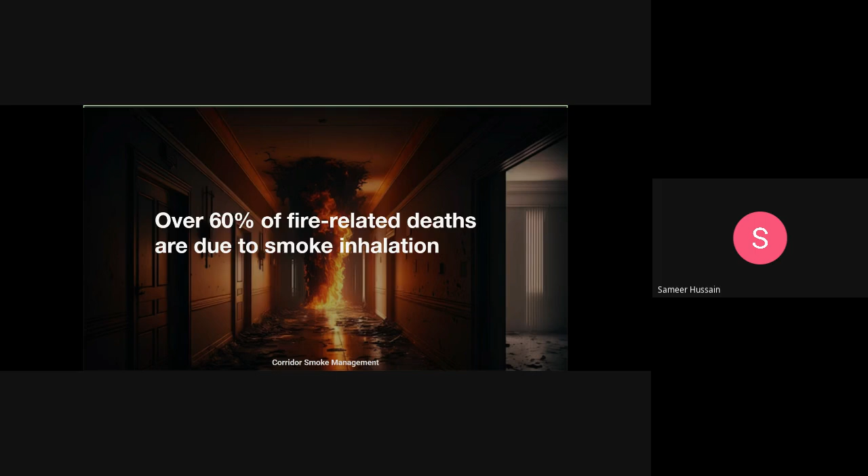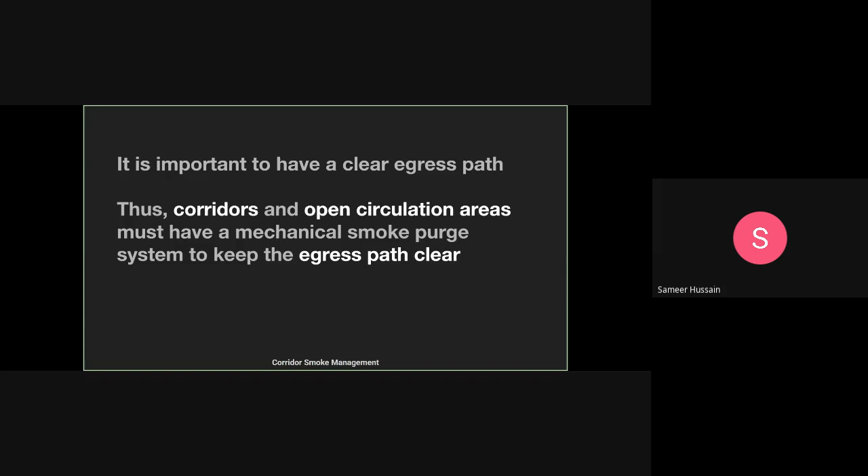So coming back to the intent, as a design intent, our job is to remove the smoke from the corridor and keep it free for people to evacuate. That's a strategy. Why do we do this? Because we need to keep the corridors and the egress path clear of smoke so that people can easily evacuate.

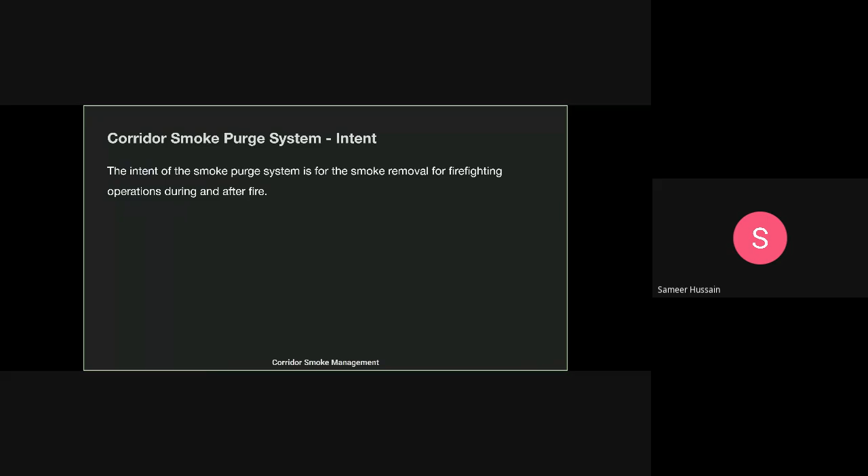Apart from people evacuating, we also need to take care of firefighting operations. The firemen, as they come to fight the fire, they also need the corridor free of smoke. So this is how we are designing the smoke management, particularly for a corridor.

So next question: how do we decide it? How do we decide how much airflow is required? Whether it is 200 liter per second, 300 liter per second, how do we decide that? So it's a very simple strategy to find out the flow rate that has to be taken out from the corridor, which is 6 ACH.

So what is ACH? ACH is the amount of air. Let's say you have a balloon - if you take out the entire air from the balloon one time in 1 hour, that is 1 ACH. So 6 ACH means you are removing the air completely 6 times in 1 hour. So the corridor smoke management flow rate required should be a minimum of 6 ACH. This is for extract.

So in corridor smoke management, what do we provide? We provide extract air and also makeup air. On extract, again, I have a question - I believe most of you are mechanical engineers. In case of fire, you have a corridor and you have a staircase. How do people evacuate?

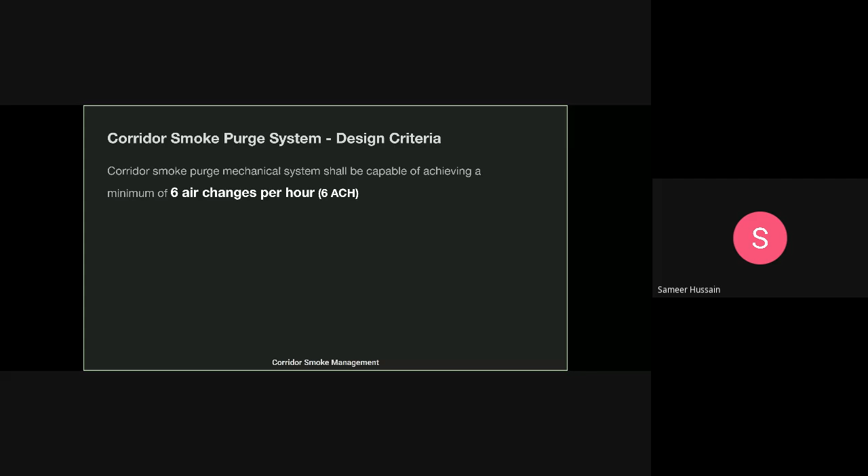As we're extracting 6 ACH, the makeup should be less than the extract. The code says consider 6 ACH for the extract, and 85% of that 6 ACH should be makeup. I'll give you the numbers one more time: 6 ACH for the extract flow rate, and 85% of that 6 ACH should be your makeup flow rate. Okay, let's move on, we'll do that in the coming slides.

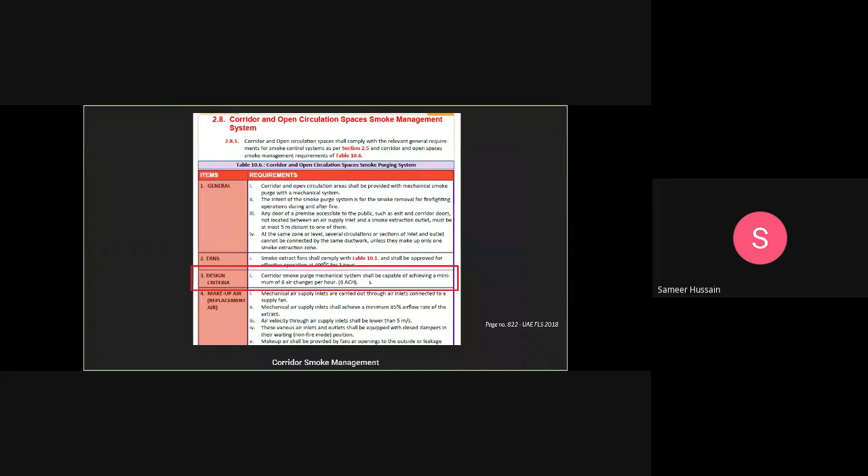So this is what the extract of the code is. This is taken from the UAE FLS code 2018 version, page number 822. If you go to this page, you'll find this particular clause or guideline. Clear? We'll move forward.

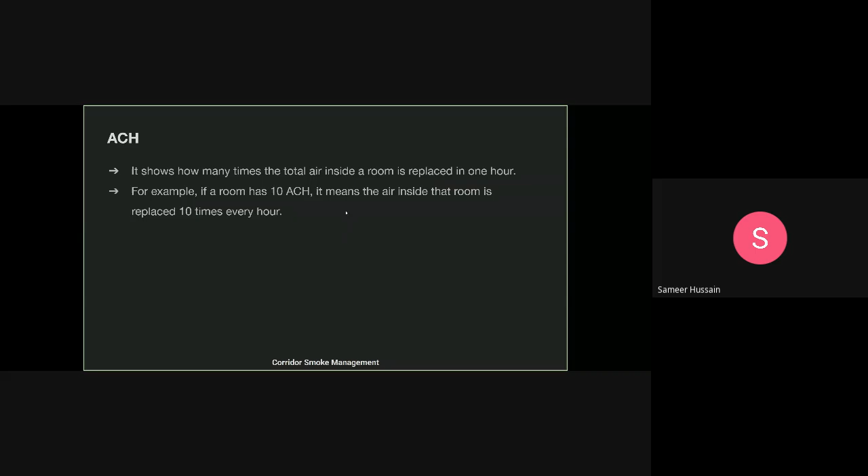So as I said, what is ACH? It's how many times the total air inside a room is replaced in 1 hour. If it is 10 ACH, you need to do that 10 times in 1 hour. Clear?

Okay, we discussed this - 6 ACH you need to do for the extract. For the makeup, you need to do 85% of that.

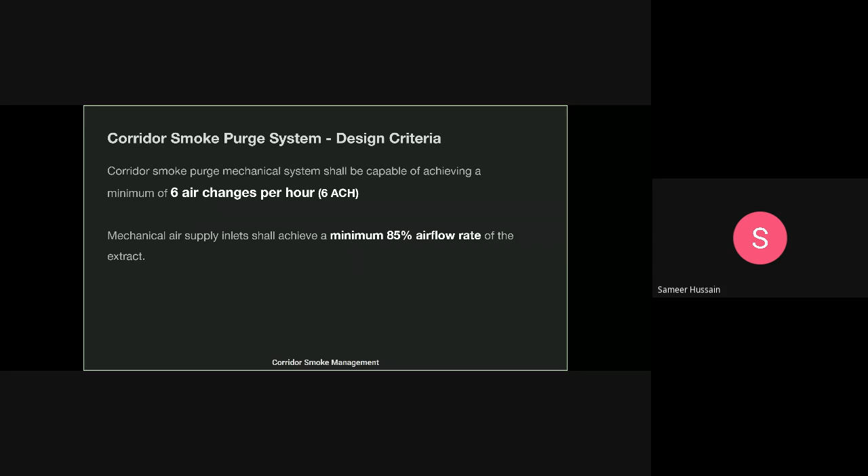Now, the question - usually designers get confused here. When you're doing extract calculations, let's say in a corridor, you will have a false ceiling, let's say of 700 mm void. So when you're calculating the flow rate, how do you do it? We have 6 ACH, and for that you take the area of the corridor into the height of the corridor, giving you the volume, into 6 ACH - that's your flow rate.

So for the height of the corridor, what height should you take? You should take it to the false ceiling level, or until soffit level. So to answer the question, you should consider the entire volume, which is until the soffit of the slab. Now, what is soffit of the slab?

Anybody has an idea what is soffit of the slab? No idea? So, till ceiling - basically soffit of the slab is, let's say you're standing on a floor, and if you look up, you'll find the slab there. So that bottom of the slab, once you look up, is the soffit of the slab. Perfect.

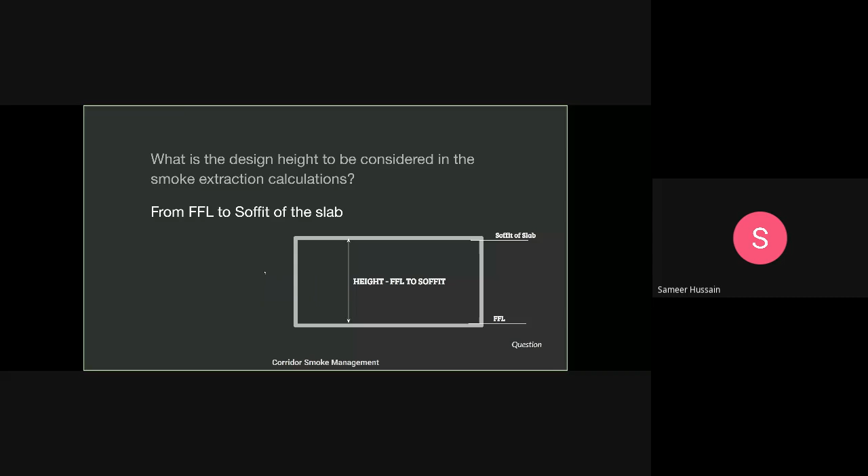Okay, next is corridor smoke purge system. Smoke extract fans, obviously, are dealing with smoke, so for sure the smoke temperature will be very high. That's a different subject, but the extract fan specifications or rating should be such that, as per code, it should withstand 400 degrees for 2 hours.

Next, the backup should not be provided - the standby is not required for the smoke fans. Whether it is corridor fans or basement fans, whatever fans they are, the code clearly says standby is not required.

Perfect. Next, the makeup fans. Again, as we are extracting the smoke from the extract fan, it should be fire rated. How much should it be? It should be 400 degrees for 2 hours, it should sustain that. Whereas the makeup fan can be fire rated or it cannot be fire rated.

Because the makeup fan pushes air from outside to inside, if the fan location is at roof level, which is open to sky, then we don't need to provide fire rating for this fan. Or if the fan is in the fire zone itself, let's say in the basement level - basement is a different subject, but just to get an idea - if the fan is in the fire zone, in many cases in basement, that fan should also be fire rated, the makeup fan. Otherwise, corridor fans mostly will be located in the roof, so we don't need fire rating for the makeup fan. But the extract fan, 400 degrees, 2 hours, is required.

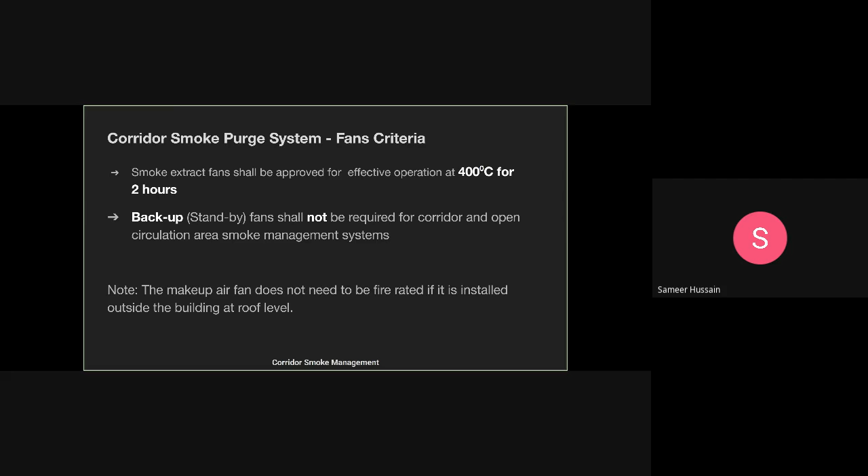This is the code where it says we need to provide the fire rating for the fan, mainly for the extract fan. So this is how the fans will look, like axial fan and centrifugal fan.

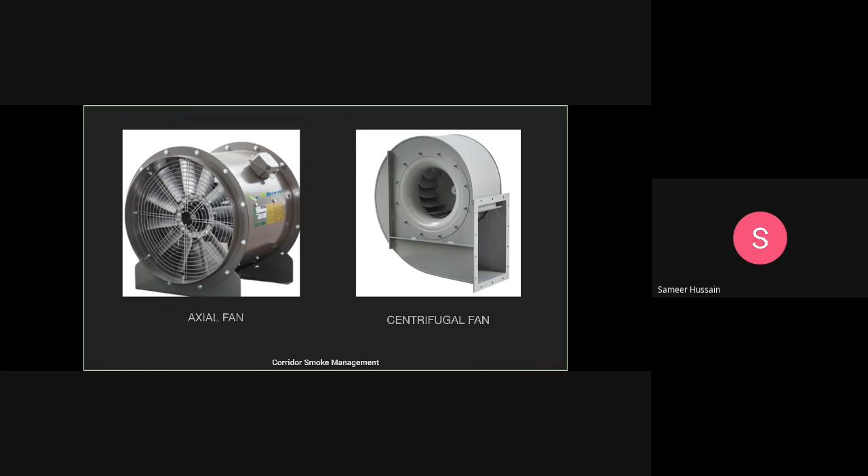Now, when it comes to emergency power, obviously during fire the building power might get shut down. So in that case, your generator should be able to work and also make these fans work. That's why fans and related equipment should always be on emergency power.

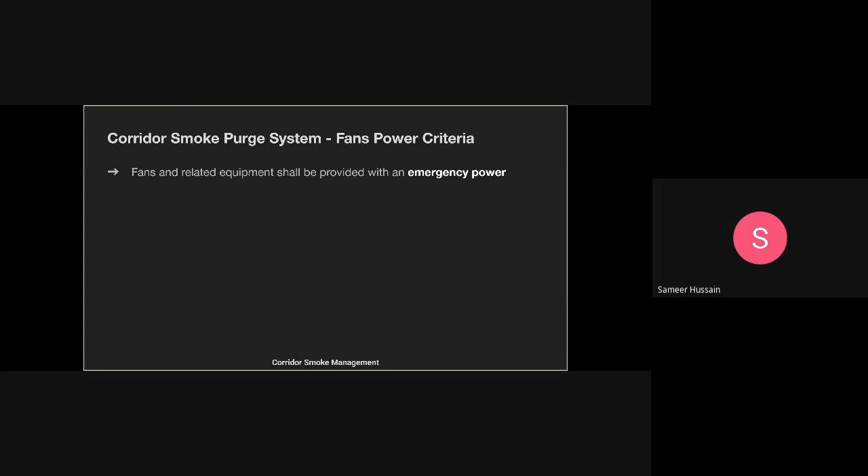Okay, now let's do a question. For a corridor of area 170 square meter, height 3.2 meters - this height is from FFL to soffit of the slab - tell me how much flow rate of exhaust should be done on this project. Give me both numbers: smoke exhaust and makeup air, in liters per second. Can you do this quickly?

533 liters per second. Exhaust. 453 liters per second, makeup air. So 533 and 453, right? Two numbers you said. Yeah, 533 is the exhaust, 453 is the makeup. So does anybody have any other answer?

Actually, I'm not familiar with Google Meet. Can we draw something here or no?

1920 for the extract, and 85% gives 1632. Okay, any other answers?

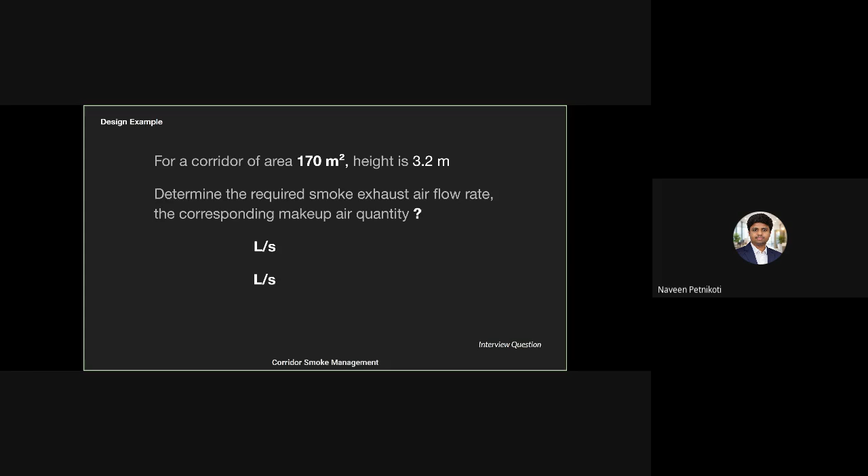Okay, so basically what we did: 170 into 3.2 into 6, we got 3264. 3264 is the meter cube per hour. Divided by 3.6, we get 906 liter per second for the extract; into 0.85 is 770 liter per second for the makeup. Right? So now it's very clear.

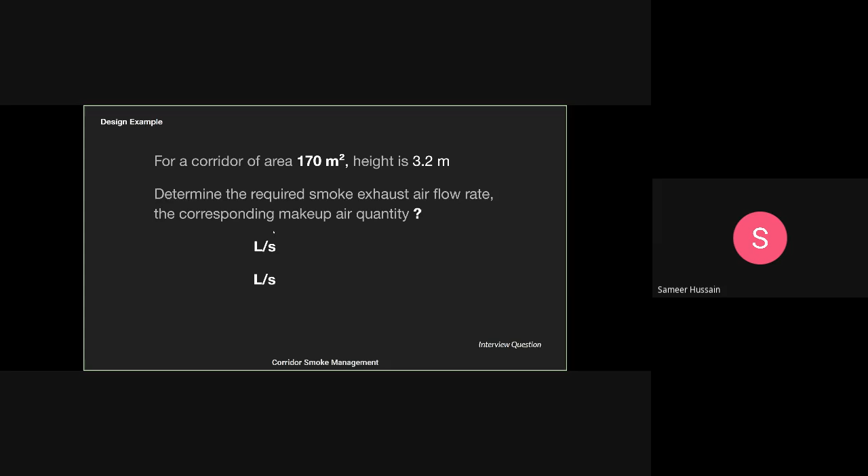Now I hope everybody understood how to do smoke extract calculations and smoke makeup quantity, how to find out for the corridor. Clear? Okay. Now let's talk about the air outlets. Basically, where do we locate these air outlets?

Obviously, when people are running towards the exit staircase door, we should not be locating the exhaust grill near the staircase, so that the people who are running towards the stair door should not feel that smoke on their face, right? So that's why the code says we need to locate the exhaust air outlet at least 6 meters away from the stair door. So that's the first point, which is the third one: 6 meters away from the exit stair door.

Second, the supply inlets and smoke extract outlets should be alternate. First we have smoke extract outlet, then makeup inlet, then smoke extract outlet, then makeup inlet. Like that, we have to place these alternately. The distance between smoke extract grill and makeup grill should not be more than 15 meters. Next, locating the grill itself: the smoke extract grill should be 1.83 meters minimum from the FFL.

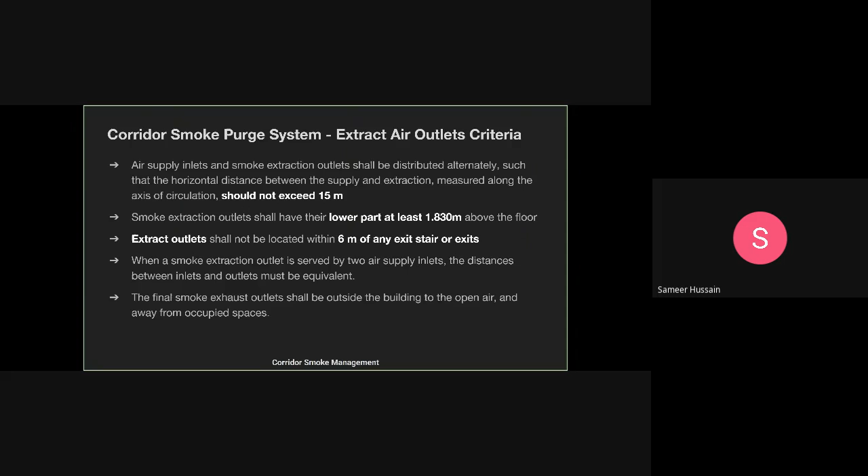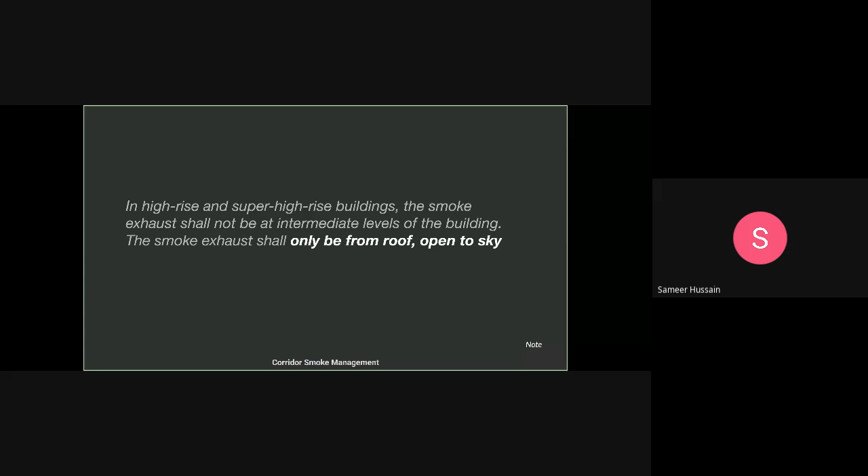Okay. So if these things are confusing, let's go on. For high rise and super high rise, smoke exhaust should only be at roof level. When you're exhausting smoke, you should exhaust only at roof level, not at intermediate levels. If you have a super high rise building, which is more than 90 meters, the exhaust should always be on the roof, not to the intermediate floor.

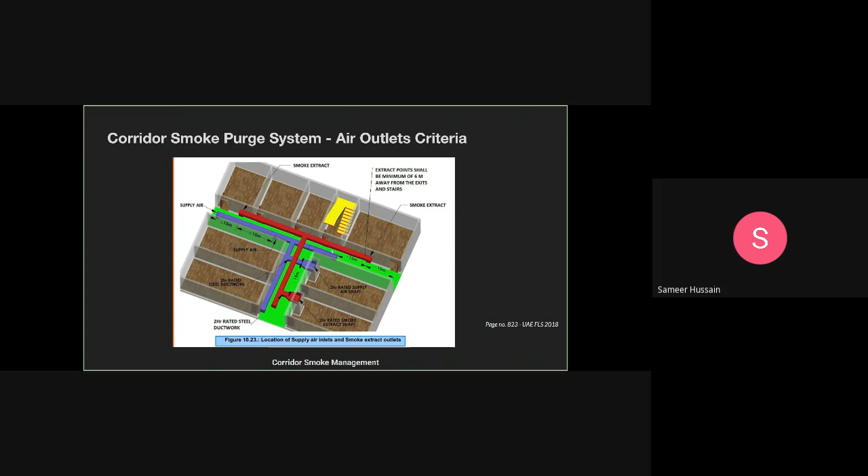Next, how do we locate the grill itself? We understood that we need to keep the grill 6 meters away from the stair door and 15 meters away from each other. But how do we place it? The bottom of the extract grill should be more than 1.83 meters from FFL. This is the exhaust grill location.

Either you can keep it here, or alternatively, what people do, and what I also do, is keep it on the false ceiling itself, like a down throw grill. Even that is more than 1.83 meters from FFL, so that is all satisfying. So either you keep it as a grill or as a slot diffuser, whatever that is. It's up to you.

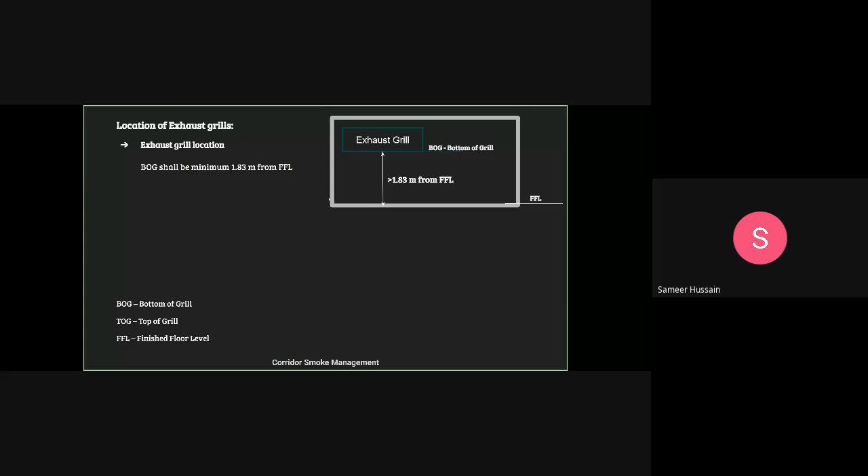It's up to your ID design or whatever design you want to follow, but both are acceptable as long as it is 1.83 from the FFL. Clear? Next. The same logic is also for makeup outlets. Makeup outlets should always, again, be alternate to each other. One makeup, one extract, like that should be there. Okay. And the velocity, the sizing of the outlets should be such that... anyways, we'll come to this later.

Let's remember this number. Air velocity through air supply inlets shall be lower than 5 meters per second. That means you can size the grills based on 5 meters per second. That is the logic here. Anyways, we'll also do that with the example. Okay. Let's do that now only, actually. So let's say the area is 200 square meters and the height is 3.2. So tell me how much is the flow rate required? Makeup, only makeup. Tell me how much flow rate is required for the makeup.

906, for 200 square meters. Are you sure? Yeah, 906.6. Sure. Just a moment. 200 square meters into 3.2, 640, into 6 divided by 3.6. Okay, I'm getting some other number actually. You asked for makeup, no? Oh, yeah. Good. This is what I want. Some people are attentive here. I appreciate. So now 906. So 906 liters per second is the answer, right?

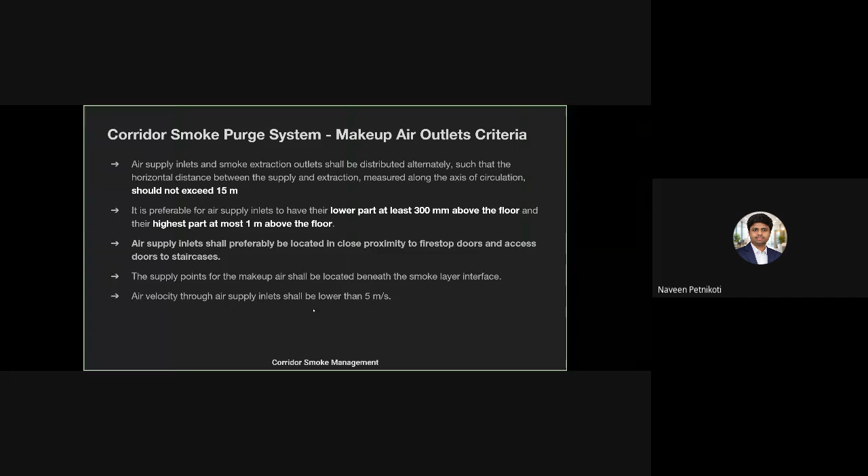I hope you guys are writing. So A = Q / V. 453 liters per second; let's convert that into cubic meters per second for easy calculations. To convert liters per second into cubic meters per second, divide by 1000. So 453 divided by 1000 is 0.453. 0.453 divided by 5 meters per second. What is the answer? 0.0906. Let's say the architect tells you to consider 300 mm for the grill height, which is 0.3. So what is the width now? Divide that area by 0.3, you get 0.302. So 350 by 300 is your grill size.

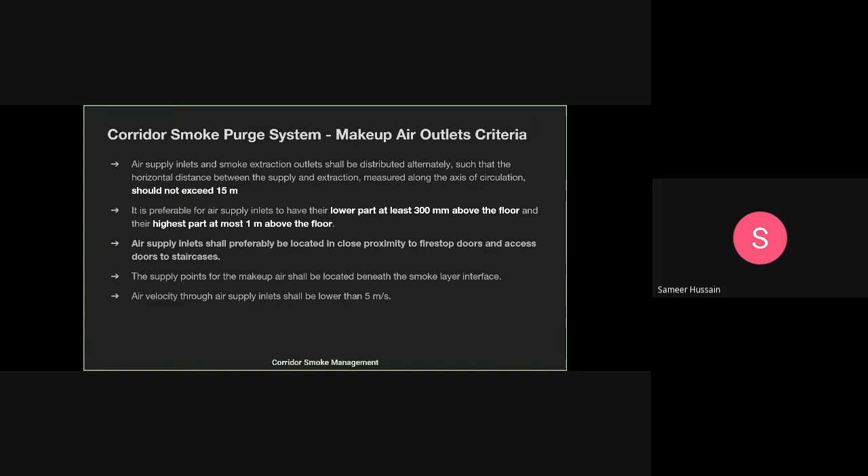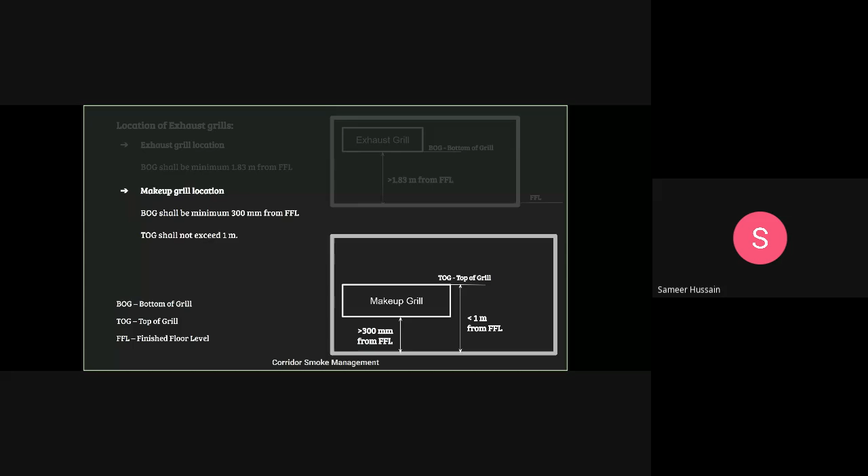Okay. So now let us do that with another example. Let's say you have 200 liters per second extract. Sorry, makeup. 200 liters per second makeup is there. So now quickly do it. What is the grill size for 200 liters per second? So what I will do, I will do it here.

Actually, I am not... Again, somebody can help me here. Do we get a chart here? Does it have some notepad to write on in this app? It's Google. Any idea?

Okay. Anyways, so I'll walk you through. So I have 200 liter per second, right? First thing what I will do is I convert it into meter cube per second. So what I will do? Divide by 1000. I got 0.2 meter cube per second. This is my volume flow rate.

Now, code says consider 5 meter per second for the grill sizing. So I'll divide 0.2 by 5. I got 0.04. 0.04 is meter square, because meter cube per second divided by meter per second: second goes, meter cube goes, so meter square will remain. So 0.04 meter square is the final answer, which is the area of the grill.

So the area of grill, let's say the architect says to limit the grill size to 200 mm. 200 mm means 0.2 meter. So 0.04 divided by 0.2, which will give me again 0.2. So that means my grill size is 200 mm by 200 mm. Clear?

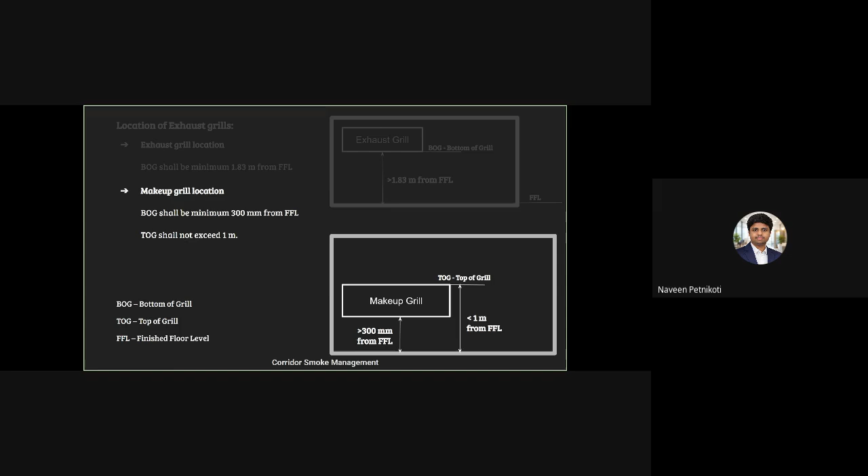Usually effective area will be, the point is the sand trap is there, right? When you talk about sand trap, that's a louver actually. This is a grill. So it's neck size now basically. What we are talking is grill neck size only, not the face area or something. No, but the point is, the effective area opening is what I'm thinking, because the grill also will have some fins, right? Small blades. So those blades is what I'm thinking.

Okay, let me study this, man, honestly, because I have something on my mind. I just want to see whether any percentage of filtration, like usually what we do is in louvers, we consider some kind of efficiency percentage from face to free. Ideally when it comes to sand trap, the percentage will be very low, almost 40%. But in the extract grills we consider close to 70-75%.

But here in the grill sizing for this one, let me study this and I will pass this message to the admin. Maybe admin will pass it to you once I study this properly. But a good question, man. Honestly, I didn't think of this question before. Thank you for that. Okay, let's move forward. But the concept's clear for you, right? Q is equal to A times V.

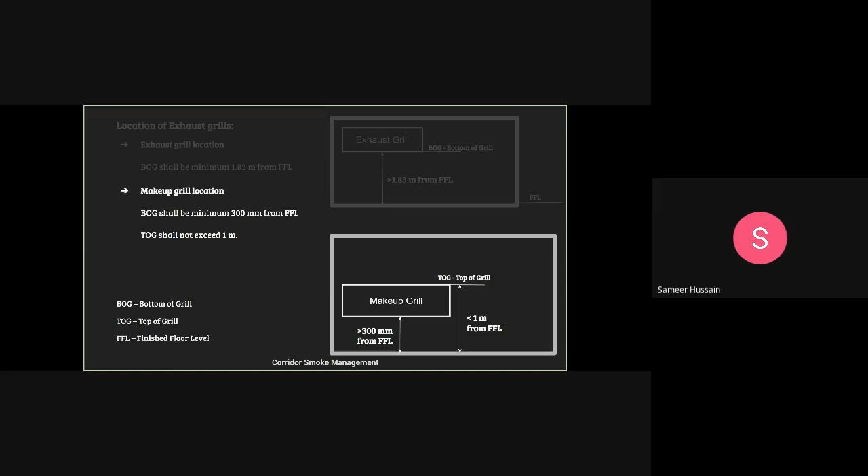Yes, sir. Also, I had a question, sir. The smoke interface area, what does that mean actually? In the last slide, there was one line like the height from smoke interface. Yeah, smoke layer interface. Basically, let's say this is 1.83. 1.83 is the height of the zone you have to create for people to evacuate. It is considered that 1.83 is the ideal height for people to breathe, right? So at least at 1.83 height, you should keep the corridor clear of smoke.

Let's say the corridor width is 1.8 meter. Height is again 1.83. So that 1.8 wide and 1.8 high zone, you have to keep that layer away from smoke. That's why we keep the extract grills on top, so that the smoke is extracted, because as the pressure is getting created, the smoke is going to the top. And you are providing fresh air, make up air at the bottom at 300 mm. That means the people who are running can easily breathe. So that's the concept.

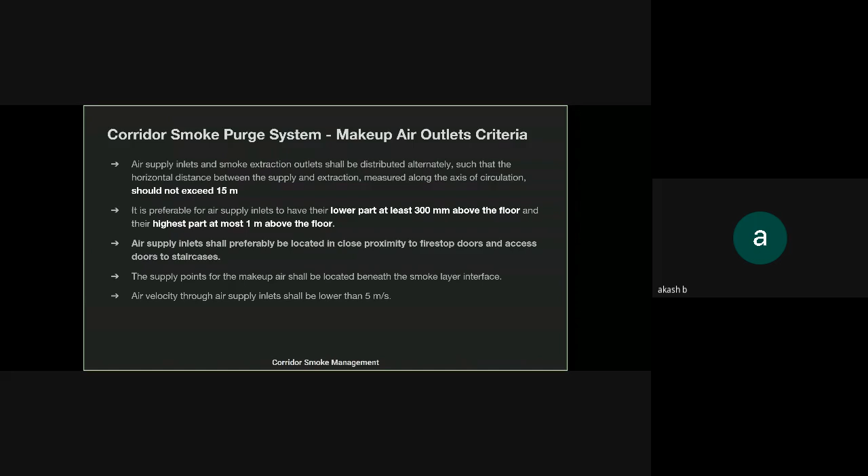So the smoke layer interface is the area below the smoke layer, which will be free for egress. Yeah. Basically, the smoke layer interface is the smoke layer, I mean the volume that is there on top of 1.83. You have to keep the points below that. So ideally, the DCD says maintain that range, 300 mm to 1 meter, so that people can breathe.

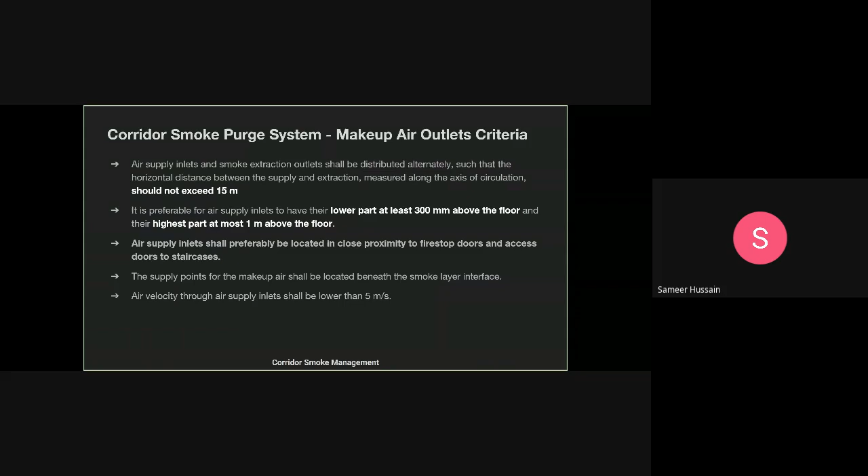So is this 1.83 a standard height or? 1.83 is what the code says actually. Standard height, I think so. I don't know actually, because the code says to follow 1 meter maximum. It should not exceed 1 meter. This 1 meter should be the top of the grill. Okay.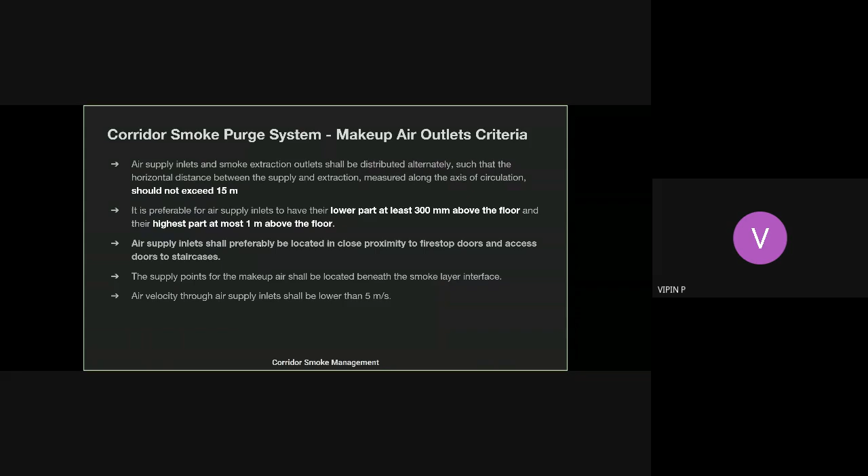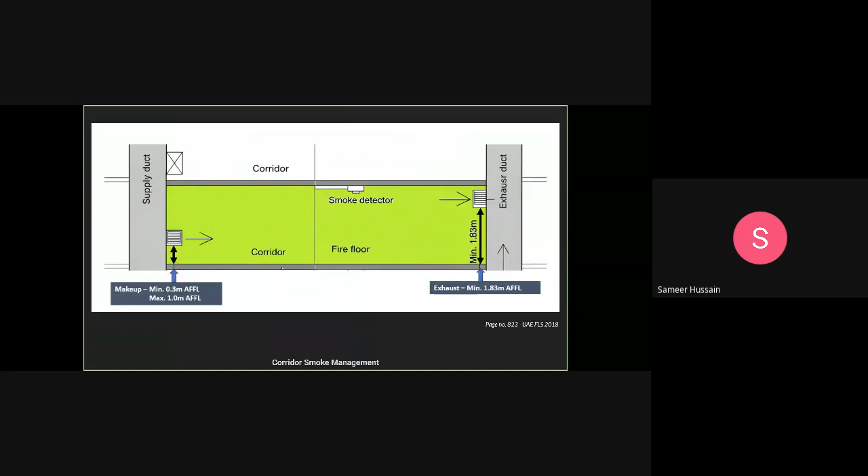Okay, what is MSD now? MSD is the damper that you need to provide at every branch that you take from the riser, right? So now if you see here, the duct is coming and you're taking a branch here. So at this branch, you need to provide MSD. So why do you need to provide MSD? Because in the case of fire, the MSD will open. The moment MSD opens, the fan will get activated and start running.

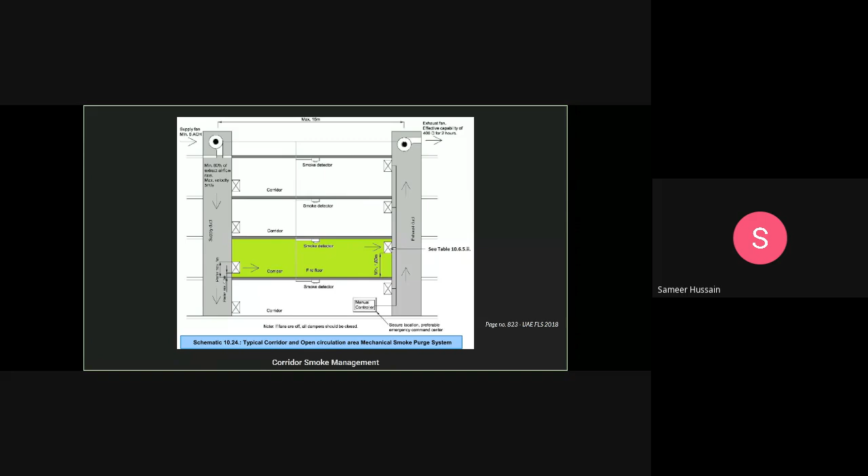So the MSD is usually closed. Normally it will be closed. It will open only in case of fire, right? So MSD is basically used to control the movement of smoke; either it will be closed or open. But in our case, it will always be closed. Only in the case of fire will it open. So this MSD will be located at each branch which you take from the riser. It is used to control the movement of smoke. Mainly, it will be shut all the time to prevent the spread of smoke.

So the other point is, in case of fire, again the code says, let's say you have a 10 floor building. The fire will happen only on one floor. DCD, I mean the civil defense or the UAE FLS, tells in the code to consider the fire scenario happens only in one zone at a time. So the sizing of the fans, you will do only for one zone at a time. You'll not do the sizing for all 10 floors. So the assumption is the fire will happen only on one floor.

A 10 floor building, let's say the corridor area is 100 square meters. A 15 floor building, the corridor area is 100 square meters. The exhaust capacity for this floor in these 2 buildings will be the same, because the area is the same and the height is the same. Even though one building is 10 floors and the other 15 floors, the exhaust capacity in that corridor will be the same. Clear? Because we are doing sizing based on one floor only, as per the code.

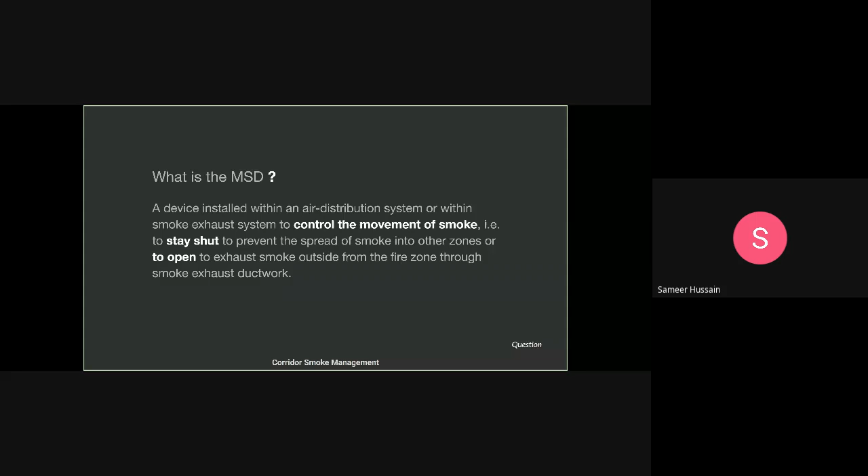So this is how the MSD looks like. Okay, this is the picture. So now we are doing the sizing based on one zone. Let's say we have provided the MSD here. Now let's say fire happens on this floor, the second floor. So the second floor MSD will open. MSD will open here, MSD will open here. On all the other floors, the MSD will be closed. Clear? That's what DCD says.

DCD says the fire happens on one floor. So on all other floors, the MSD will be closed. On this floor, the MSD will open. Clear, right? Perfect.

So now I'll talk about some other aspect. We understood how much flow rate I need to provide on the floor in terms of makeup flow rate, and how much I need to extract, the extract flow rate. In the earlier example, we got an extract flow rate somewhere around 906 liters per second. That means the fan capacity should be 906 liters per second? Not really, actually. Why? Because there's something called dampers.

So now when the fan is running, when the fan is blowing air here, let's say fire happens on the second floor, the fan is transferring the air from the fan to the second floor, right? As the air is passing down, obviously air will travel here as well. But here we have the MSD, which is closed, because when fire is on the second floor, the air is getting delivered into the second floor. But on the 9th floor, 7th floor, 6th floor, the MSD is closed, but still there is small leakage happening here. So that leakage we need to understand.

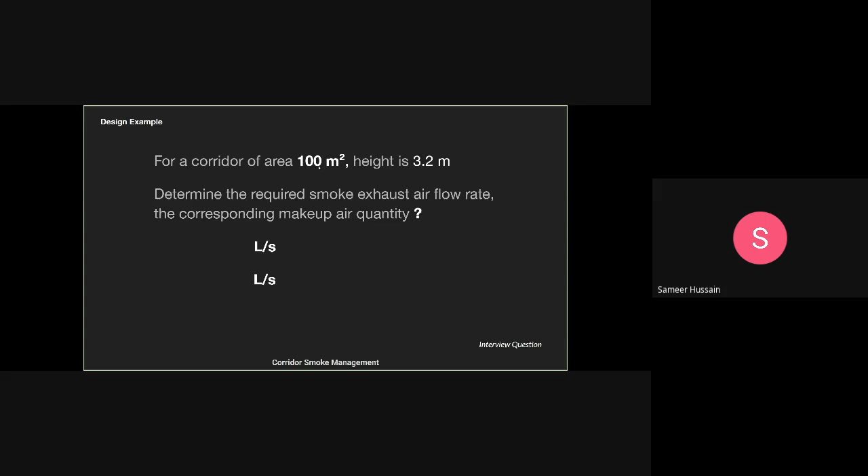Actually, what is damper leakage rate? I have one question. During the fire scenario, will the MSD be open 100% or 50%? Because it's monitored from the BMS also. So it will be open during the fire scenario. Will it be 100% open, fully open, or a little bit, 50 or 80%?

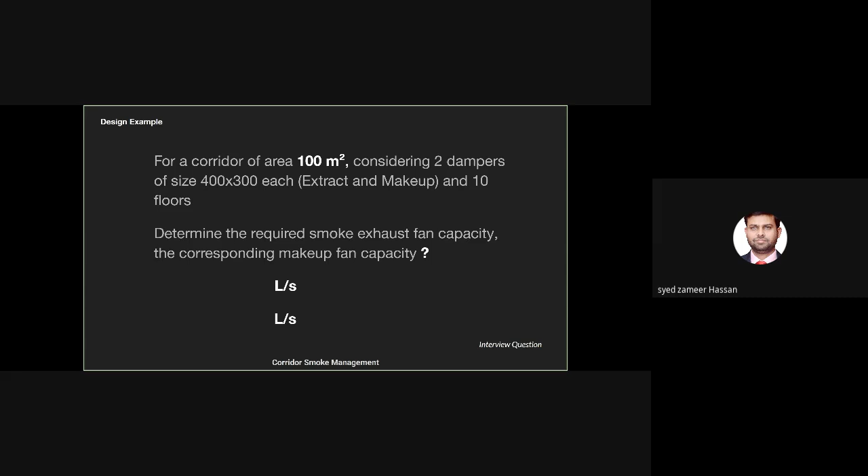Okay. Now the point is we need to provide the flow rate as per 6 ACH, right? Extract means 6 ACH, makeup means 0.85 of 6 ACH. So your damper should open such that the entire volume that is calculated can be delivered. Which means in our case, we size it based on full capacity. Let's say I have to give 200 liters per second in that corridor, so the damper will be sized for 200 liters per second. So in this case, it should open 100%. Okay. So now let's do one calculation.

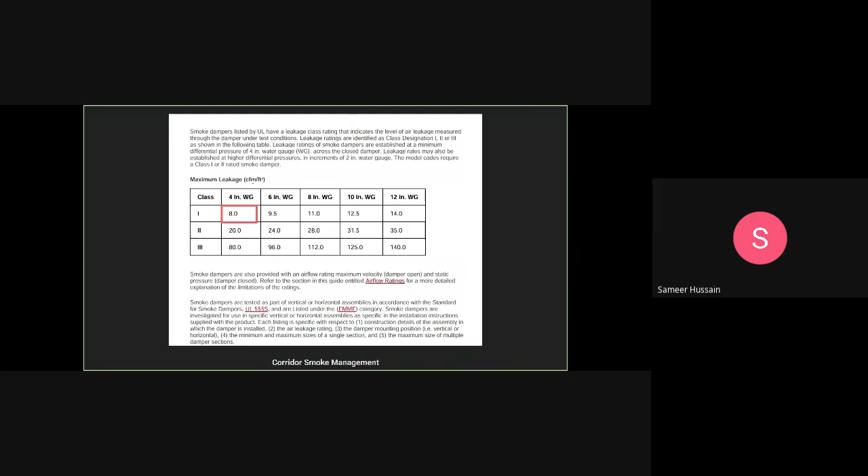So 40 liters per second per square meter. This is the damper leakage rate. 48 liter per second? No, sorry. 0.2 liter per second? No. 40 liter per second per square meter. As per this, see here, this 8 CFM per square feet, right? The 8 CFM, if you convert it to SI units, comes to 40 liter per second per square meter.

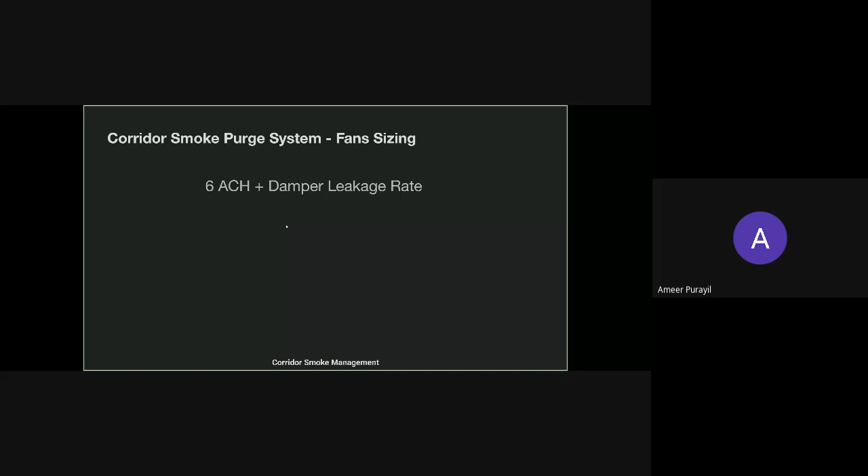So now, a simple question again. For 100 square meter corridor area, consider 2 dampers of extract and makeup and a 10-floor project. Height is 3.2. Now tell me the fan size. I'm not asking the corridor extract flow rate, I'm asking the fan size. Size means you need airflow? Yes, I need airflow. See here, you need to do this: 6 ACH plus damper leakage rate. Yeah, exactly, I need airflow.

Any others? Okay. Now you can look at my screen. Now I'm considering 10 dampers. So what is the damper size? 400 by 300 mm. So what is the area? 0.4 into 0.3 in square meters, so 0.12 square meter. My bad, not 102, it's 40 only. Sorry, this is a mistake. If somebody is taking a screenshot, please correct this. Damper leakage rate is 40 liter per second per square meter.

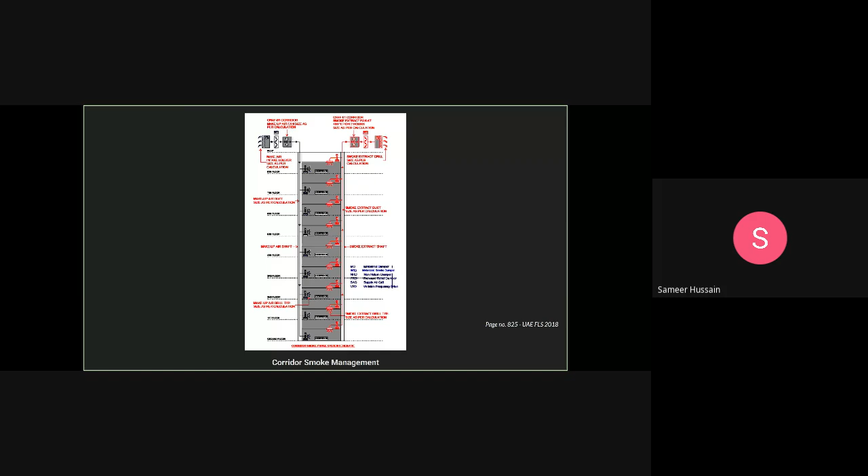Clear? Okay, yes. That's how it is, okay.

Now here I have one mistake actually, in this diagram, which I told you. This is correct, this 40, right? 40 liter per square meter. One mistake I told you to correct.

I have one more mistake here. Can somebody identify that? Huh? 10 - we need to mention 9. Very good, 9. I mean if it's 10 floors, you have to consider 9.

There's a third mistake also, one more mistake here. Tell me, can somebody identify that? This is the third mistake on this screen.

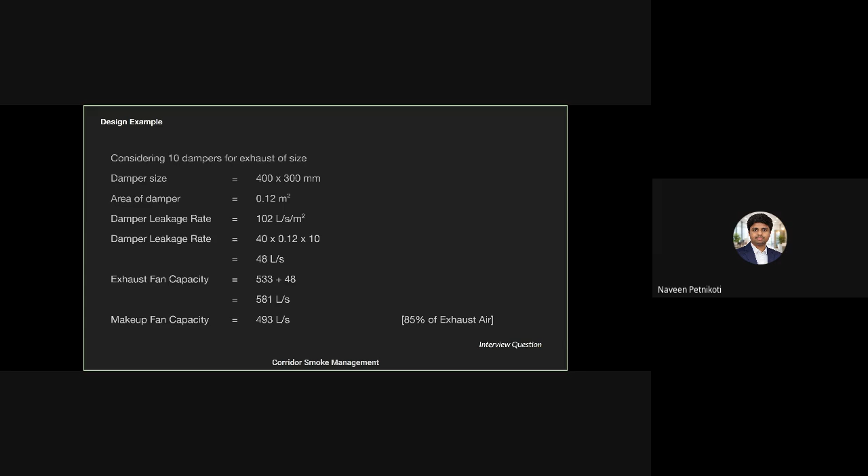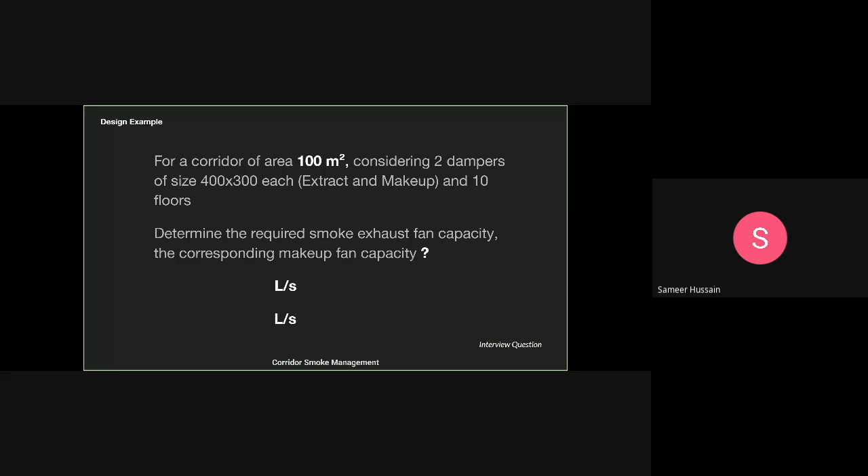Yes, the fan capacity, makeup fan capacity. Tell me how much it is. Just 1 minute. What's the area? 100 square meter into 3.2. So tell me, what is the makeup fan capacity?

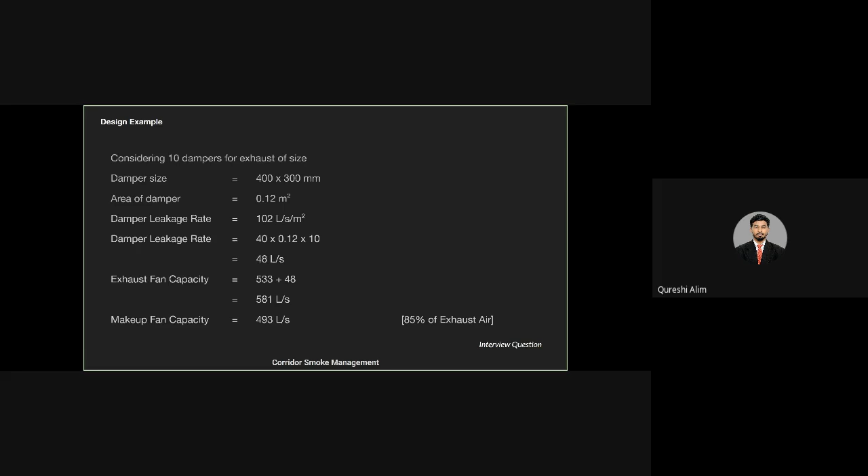581? No, makeup - how much is makeup? Capacity - no, what is the mistake in the first place? Did anybody understand the mistake? Makeup also will be fully opened, you know. Yeah, makeup is fully open, but still there is a mistake here. I thought somebody, the way they answered makeup fan, understood it. I thought you understood, man.

Okay, I'll tell you now. Okay, now tell me, how much is the flow rate I need for the makeup in the floor corridor? How much do I need to put in the corridor? Only corridor, tell me how much. Only in the corridor, how much do I need to put makeup for 100 square meter? 453 liters per second, 453, right?

Perfect, 453. So now, how much is the damper leakage we got? 48, right? Damper leakage, how much we got? 48. Let's take an 11 floor project. With 11 floors, we have 10 dampers, right? So with this logic, we'll get 48 liter per second, the damper leakage rate.

So now if you see here, what it is, he has taken 581 liter per second, directly multiplied that by 0.85. You got how much? 493. Right? But 0.85 should multiply to what actually? You should multiply only to the corridor flow rate.

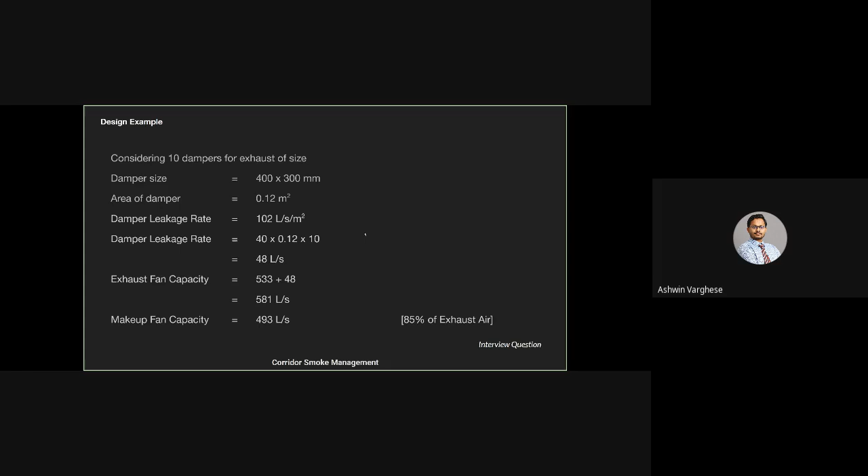You should not do the 0.85 to the number including damper. This is a mistake here. You understand or no? Yeah. Is anybody not clear on this? This is a mistake - why? Because you are doing 0.85 to the total flow rate.

This total flow rate - how you got it? 6 ACH plus damper leakage rate. You should not do like this. You should do the 0.85 only to the 6 ACH. Damper will be as it is for the makeup as well. So 453 plus 48, you get 501. Clear?

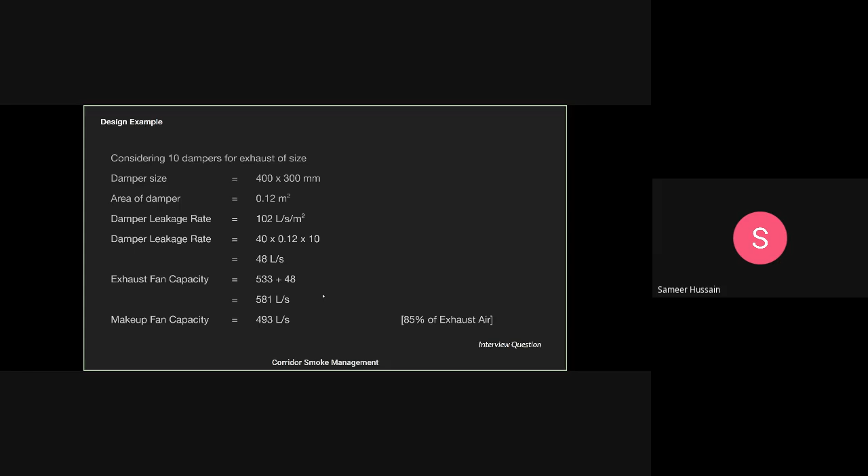So with that, we come to the end of this presentation. Thank you for your time. I hope I could add value to your time, and I hope I could add some knowledge to your experience.

Yeah, I agree, but again - regarding the material, can you please let me know what material or standard we can follow? What is normally followed in the standard? What is the industry standard for that? Okay, we can check that.

Assalamu alaikum, thank you Mr. Sameer for a beautiful presentation on this topic. I have a small question regarding the material of construction for ducting - it is GI, as you told, rated 400 degrees for 2 hours. Do we specify any thickness, like gauges - this is the gauge to be standardized - and should this duct be UL listed specifically, or can it be DCD approved but not UL listed? That product also we can look into. Two questions, please.

Honestly, this question needs specifications to be checked. What I understand for sure is it is GI duct. The thickness of the duct I have to check, because the thickness depends on the sizes, which happens usually in our HVAC construction.

The thickness of the duct depends on the pressure classifications and the rating also, I think. But in fire, is it standardized that it should be 1.2 mm thick, or can it vary based on the pressure classification and the airflows and all?

This was one point, and all the ducts need to be UL listed, or can be without UL listing but DCD approved. There are some manufacturers in the market who are not giving UL listing in accordance with ANSI code, but they are already DCD approved. These kinds of ducts can also be used by manufacturers.

Thank you. Thank you very much.